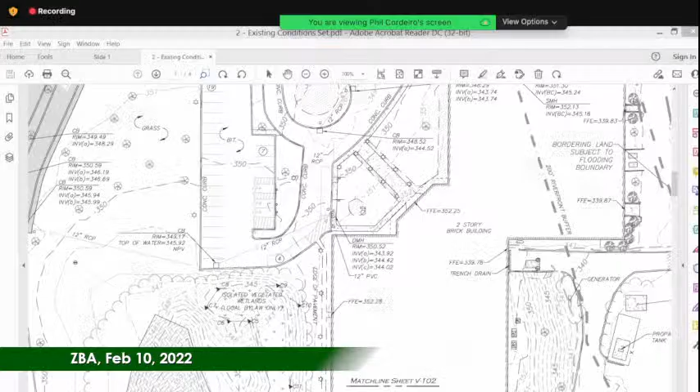Here we go. What is it here? Yeah, there we go. So the C series actually extends onto the next page, and I think the B series is shown on that page as well.

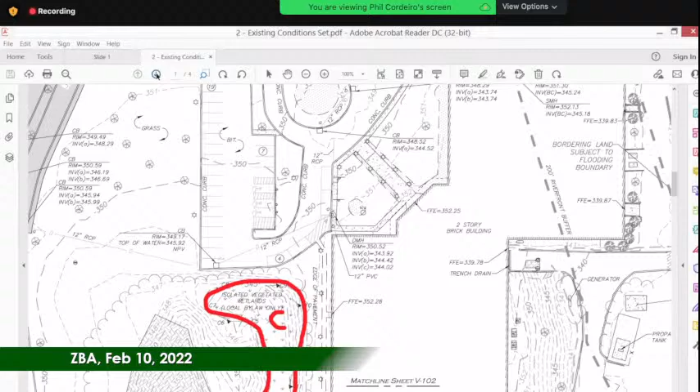So this is the grand scheme picture. There are two existing square-shaped buildings that overlap in a chain-link configuration from an aerial view. The C series is directly to the west - north is straight up, correct? Yes. And the B series is just to the south or southwest of that westernmost building, just south of the building, not along the parking lot. Does that make sense?

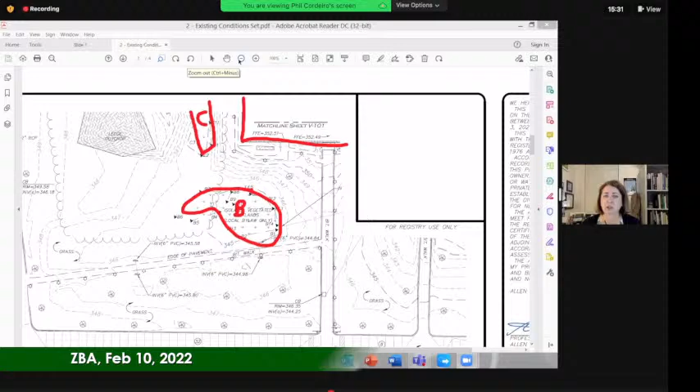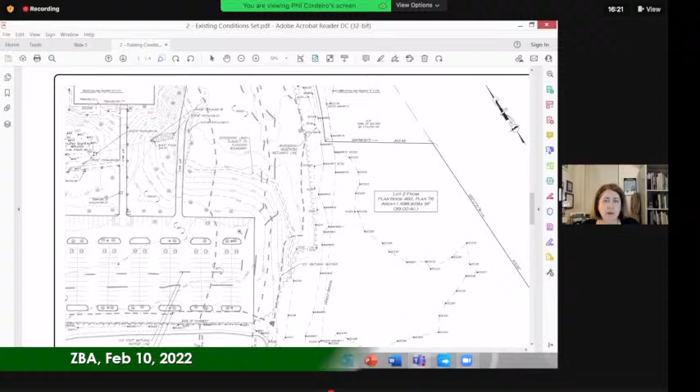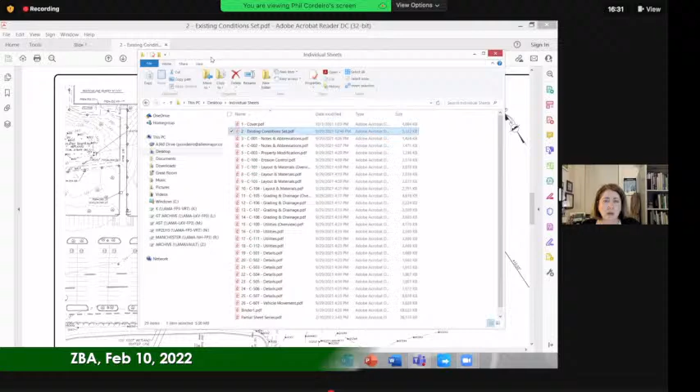So we know the applicant will be filing a notice of intent with the Conservation Commission, and again we recommend clarification of the jurisdictional status of these areas. The applicant also proposes alteration within the 25-foot buffer zone in three different locations: one associated with infiltration system number 1 in the northeast area, one an infiltration system south of the existing parking lot, and the third area of alteration within this 25-foot buffer - a local Conservation Commission jurisdictional area - associated with the proposal for compensatory flood storage.

Sorry to keep switching screens on everybody. No, that's okay - actually this is a good screen to look at, the overview screen. So I will highlight what Amy just referenced, just to circle back on it. Apologies for the delay.

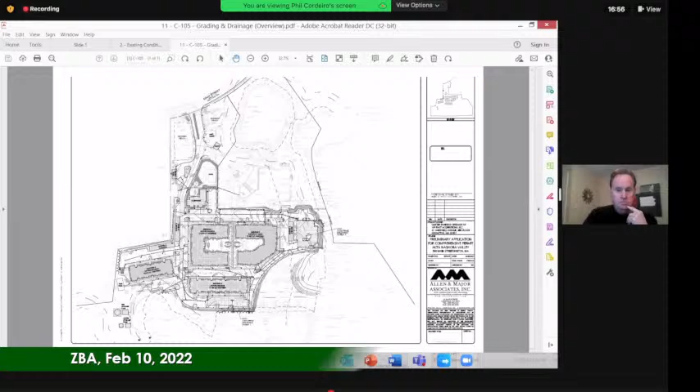Okay, and I'll keep talking, then we can just go back to this a little bit.

The third thing we commented on is the additional permitting considerations specific to the alteration of greater than 5,000 square feet of freshwater wetlands, which will necessarily entail some permitting at the state level for a water quality certification, and potentially may also trigger a MEPA filing. We recommend the applicant acknowledge this during the notice of intent filing, and provide the town with copies of the permit applications for these other agencies as well as the Conservation Commission permits. They may also need Army Corps review because of the extent of the alterations, but the jurisdictional status will determine that.

We bring this up because the applicant has requested a waiver for the local bylaw, with the alteration of two potentially jurisdictional resource areas under the bylaw, without a plan for mitigation at this point, as well as alterations within their 25-foot buffer that come within just a couple of feet, like 2 to 3 feet from the actual wetland boundary where there is potential for additional wetland alteration. We feel the ZBA may wish to retain some of the local bylaw provisions in order to protect the interests local to the resource areas in the town.

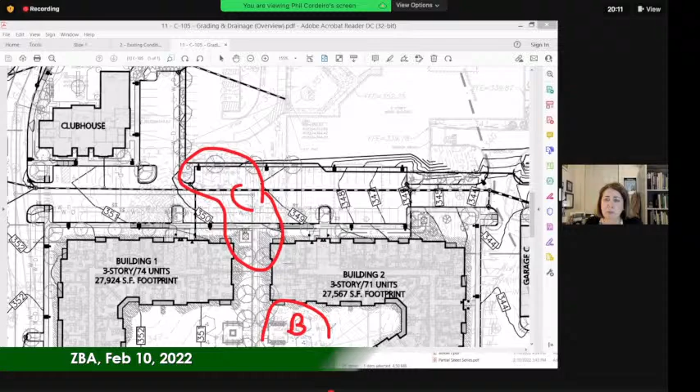Is that sufficient for you, Amy, to continue? It is - I've actually concluded our comments, other than to circle back and state that part of our scope was to do a site visit. We have not yet done one based upon the existing snow cover. That may be feasible in the next few weeks if it continues to stay as warm as it is.

Mr. Chairman, if I might just step in here for a second - Joe Peznola, the zoning board's MHP consultant. There may be a process issue here in that a portion of wetland C appears to be over their proposed lot line. The board doesn't have any jurisdiction to grant relief on allowing the filling of that wetland on the parcel that's going to be retained by the current owner, with regard to the modification of the commercial office building.

And just putting out whether the applicant can speak to that. Mr. Chairman, I didn't know if you wanted to hear from us as the applicant now, or wait until after all your consultants have spoken? I think I can address Amy's comment and Mr. Peznola's comment also, whatever you'd prefer. But why don't we - so we have Amy dealing with the wetlands, and Janet going to deal with other aspects - why don't we address these items if they're easily addressed, and be more relevant in people's mindset at the moment?

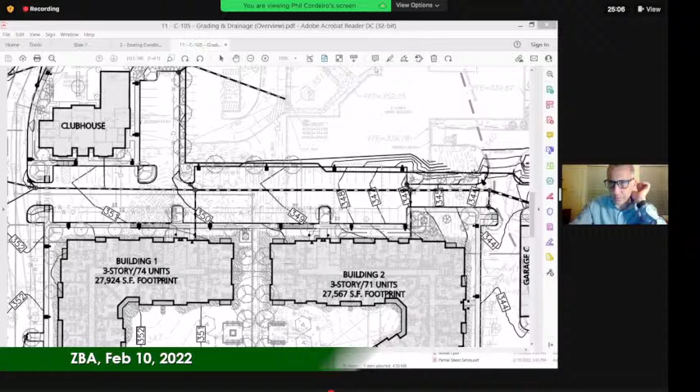Yes, Mr. Chairman, just to expand upon what Mr. Cordeiro said, if a stormwater basin, if you will, was constructed after 1996 with the approval of the local jurisdictional bodies, being the Planning Board and the Conservation Commission, it cannot, under the state wetlands regulations, be deemed a jurisdictional wetland. So I think that's what they're trying to get around, is whether those features were built as stormwater features, and that they were built after the threshold date of 1996, which is a date that's in the current Massachusetts wetland regulations.

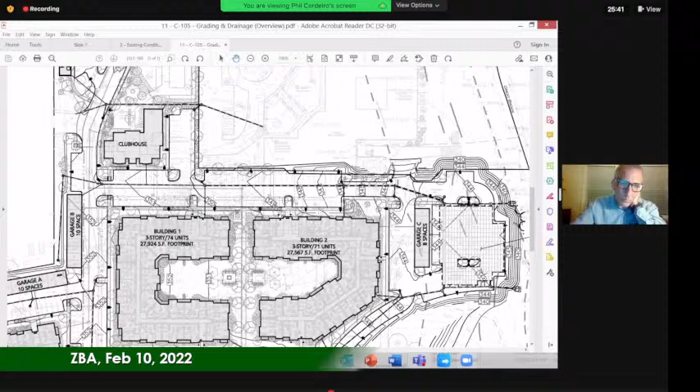I can confirm that, that is true. So being mindful of the dates is something that the applicant will need to demonstrate to the board's satisfaction.

And then other than that, there is just the note about providing mitigation, for raising those concerns for us to keep our eyes open for, and the potential for the proposed alterations providing proximity to the wetlands with the extensive grading.

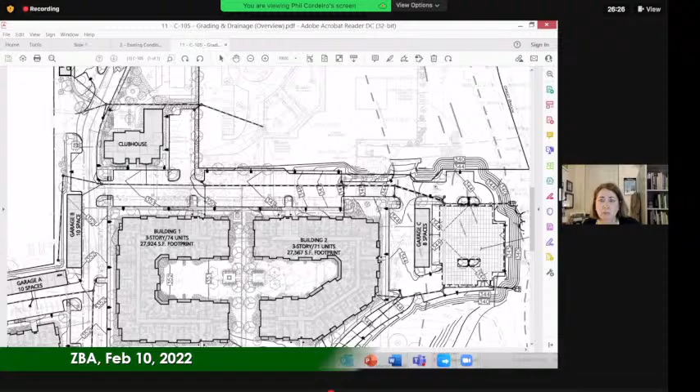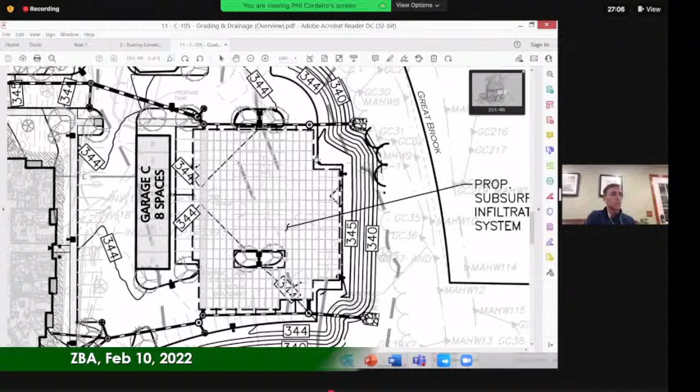So just to jump in while that topic is hot also, Mr. Chairman, members of the board, I did have occasion to speak with Ms. Bernardo yesterday regarding the peer review letter, just so we can all reach an understanding in terms of the necessity of the grading that we're showing and the stormwater locations that we are showing on the plan. Ms. Ball highlighted two areas in her presentation and in her letter, one of which is on the screen here that you can see, which is adjacent to our subsurface infiltration system 2.

The necessity to build up the existing grade to make sure we have separation of groundwater results in the slope that you see on the easterly portion of the site, which results in the proximity grading relative to the delineated wetland resource areas, again, to be affirmed by the Conservation Commission. So we're going to take a hard and close look at that, recognizing the concerns, and see if there's a better solution in the interest of protecting that wetland area in the 25-foot buffer.

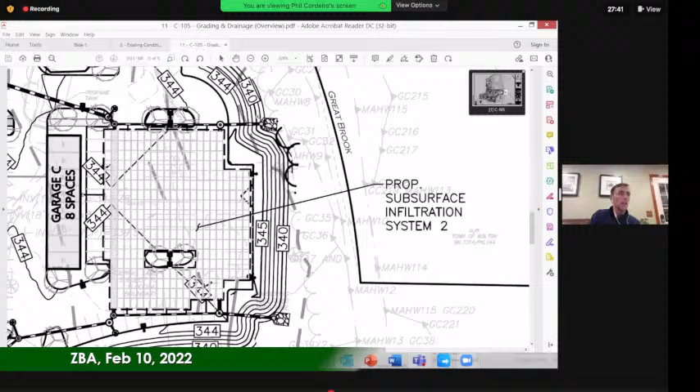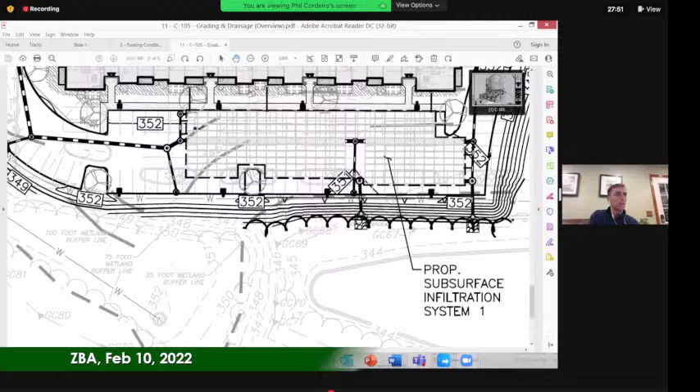The alternate area that was raised is similarly on the southerly portion of our site. And this one gets a little dicier in terms of the exact vernacular of the wetland resource area. For the same reasons that I outlined with the isolated pockets of B and C, the rear fire pond was also created as part of a stormwater management system. So there's ambiguity as to whether there's the same protective radius around it in terms of the no-build buffer line that we are encroaching upon.

So as we work through that condition with the commission, we will work with your consultant in terms of identifying the performance standards that we need to meet relative to the designation that the commission applies here. And that work, again, on the back side of the site, we identified potential delineation through this line, this red line, which would ultimately result in a buffer zone approximately here. Excuse the crudity of my drawing, but the grading, the darkened line that exists between those two red lines, is the encroachment within the potential 25-foot no-touch buffer zone. We'll again take a closer look at that and rely on a lot of the documentation that we have to prepare and work through with the commission.

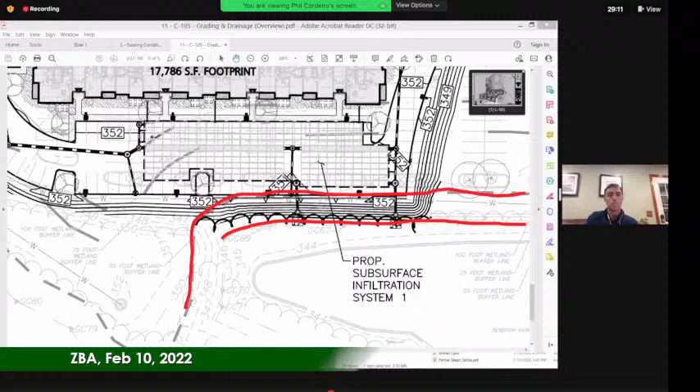Should we continue with our stormwater presentation, or do you have more wetlands questions? Sure.

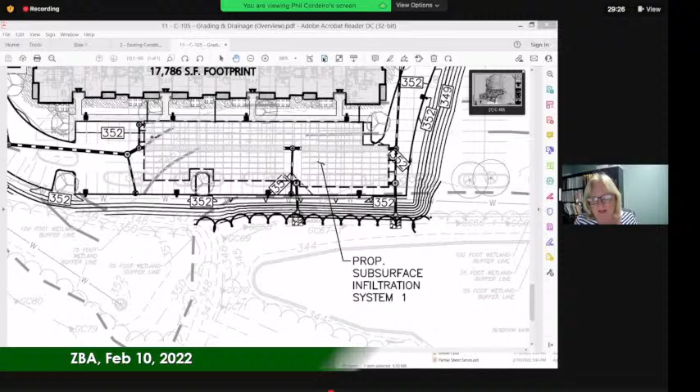Again, for the record, my name is Janet Bernardo, and from Horsley Witten, we looked at the stormwater of this project site. Allen & Major really did a nice job on their stormwater design.

Basically, the system has a number of proposed catch basins, proprietary separators, and pipes conveying stormwater, discharging to two relatively large subsurface infiltration systems, as we just talked about, one on the right-hand side and one on the south side of the property. The one that was just marked in red, that's number two.

That one is located in an area that's currently grass, as discussed by the applicant and Phil, the applicant. We would really prefer to see that one pulled outside of the 25-foot buffer and respect that buffer zone for Great Brook. The subsurface infiltration system 1 is in an existing parking lot.

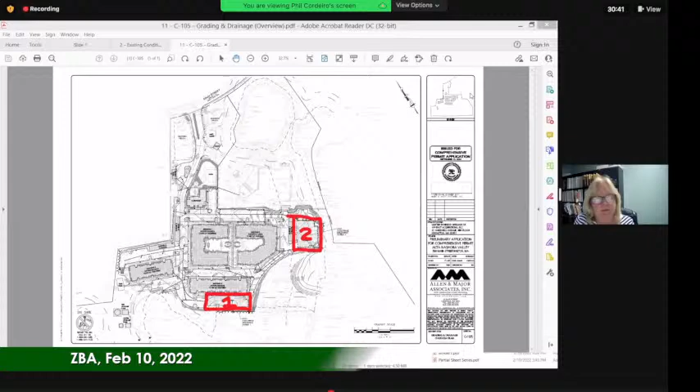The grading that is proposed to the south, between the system and the wetland, or the detention basin, or the fire pond, or whatever it is designated as, is relatively steep, and it's really coming off of the parking lot, right up to the edge of the wetland. We would recommend that they pull that further away to avoid any erosion in the wetlands.

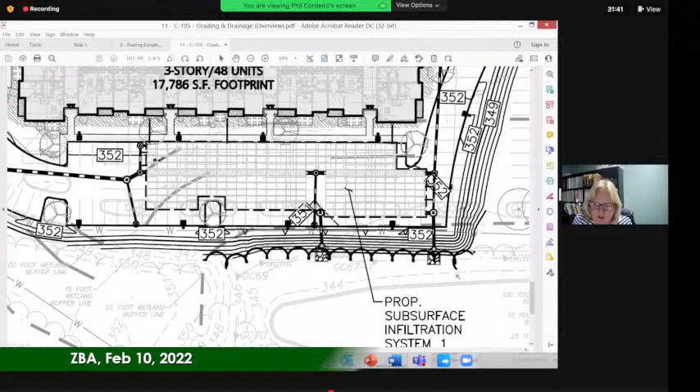The water quality for the design is fairly substantial, so I don't suspect that there's going to be a problem with sediments or pollutants or metals getting into that wetland system, but the discharge point could cause erosion. And if the riprap outfalls are actually inside the buffers or the wetland line, that's considered a fill that the applicant will need to acknowledge and mitigate for. So that's basically our biggest concern, trying to pull those two systems a little further away so that they can respect that 25-foot no-disturb zone.

The applicant also has an area for compensatory flood storage, but we didn't find the calculations for that in the package. Maybe they were there, but it was obvious that they were proposing something in this area, which is an existing parking lot, where they're pulling back the grades to provide compensatory storage.

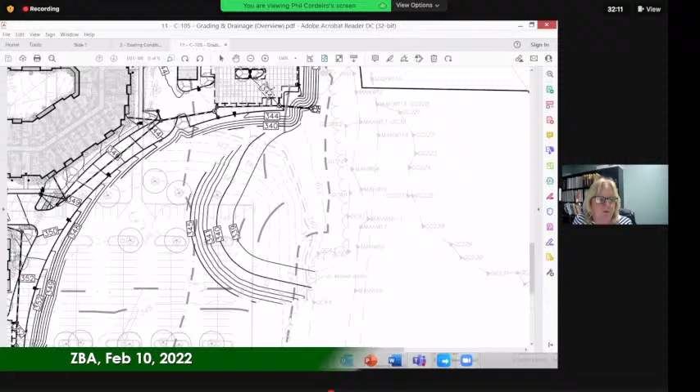This kind of large circle, if you pull out a little bit, you can tell it's a large circle. That is the new well. Is that correct, Phil? This is the new well that is being put in, so that's a radius that they are proposing to protect for that well, having zero impervious area inside that radius, which is why they're removing the pavement. They've added pavement to the north of that, in an area that is now grass, which we struggled with because it just didn't seem reasonable to take away asphalt and then put it in an area that's grass. But the applicant, I think, will address that in some way, whether the well has to be in this exact location, and this makes the most sense.

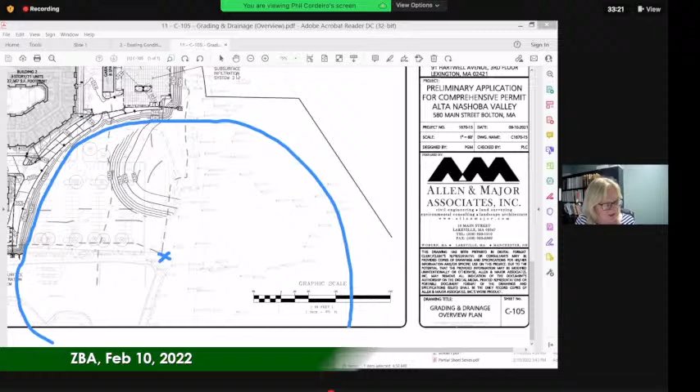So some of our other comments that we are concerned with, there was some minor discrepancies with numbers. We believe the applicant will be able to address those relatively easily, with the amount of recharge required and provided, and the size of the riprap at the outfall. In the HydroCAD model, there was a watershed that really should be divided into two. It's something the applicant should be able to respond to relatively easily.

These systems, we didn't see the test pits. We understand that there's test pits within these two systems, but we couldn't read that information. It was hard to read them on the plans. We think we found them, but understanding exactly where the test logs were and the information that goes along with them, it's like they're there somewhere. So we're looking for that test pit information to review, to understand where the separation to groundwater is, and to make sure that there's adequate separation from the bottom of the system to the groundwater.

If there's less than 4 feet, it needs to have a minimum of 2 feet, and if it's less than 4 feet, they'll need to do a mounding analysis. So we would expect that to come along if there's actually a less than 4-foot separation to groundwater.

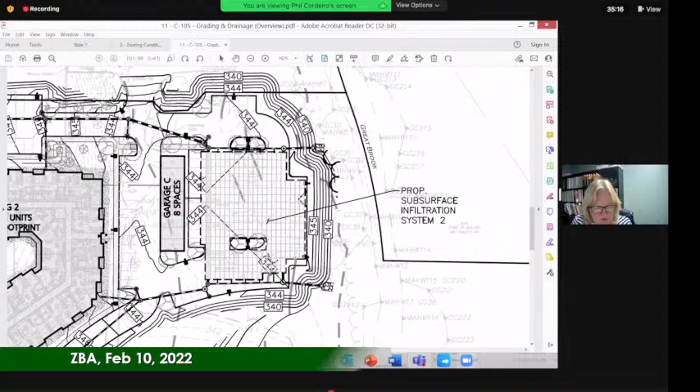There is an existing drain pipe that goes underneath the leach field, which is unusual. So we brought that up as something to pay attention to. The Board of Health may be interested in this drain pipe. Usually you don't have a drain pipe underneath the septic system leaching field, so somebody, the Board of Health, would be interested in understanding that and whether that's acceptable practice.

As far as the two wells and the water supply, the wells will need to be permitted through Mass DEP, as well as the wastewater treatment system, which will have to go through Mass DEP guidelines for the design, construction, operation, and maintenance of a small treatment facility. So those systems...

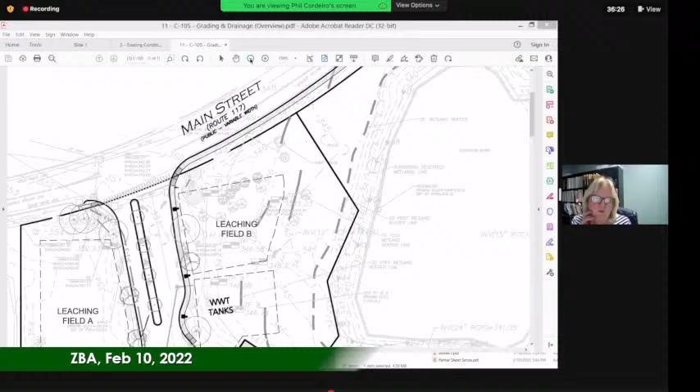The applicant has requested a waiver from the local regulations, but they will need to go through the state regulations anyway, so we do not have any real objection to granting those waivers, though your Board of Health may — that's, of course, we defer to them. But our biggest concern is the separation from the impervious area and limiting the work to within that 25-foot no-disturb zone from the wetlands line.

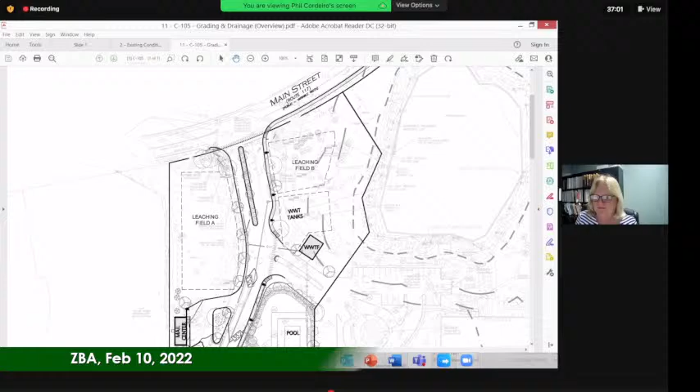Any questions on that? Did you follow all of that? If Phil Cordeiro or the applicant wants to speak to some of your inquiries about documentation and calcs and whatnot, that'd be great. And if anyone from the board has any questions, I want to thank you again for doing a thorough letter review for us. This is helpful for the project dialogue and report.

Mr. Chairman, speaking from Allen and Major for the applicant, we certainly also echo what you just said regarding Horsley Witten's review. It was quite thorough and detailed. We are quite confident that a lot of the administrative detailing that has been asked for, clarifications, detailing, we can accommodate. A lot of bookkeeping issues we will deal with. Riprap sizing, mounding analyses — those will all be responded to since the issues were raised.

We'll absolutely address that. Obviously their biggest concern, what we touched upon under the wetland umbrella, is the proximity to the wetlands. So I expect we'll have a couple more conversations about that, and again, we're confident we can reach a good solution for both of those areas.

I think the only thing I'd want to raise for the board that Ms. Bernardo brought up was really centered around the well, which our new well is here. She pointedly asked the question, does it need to be there? And the answer is yes. In previous hearings with this board, and certainly with the select board...

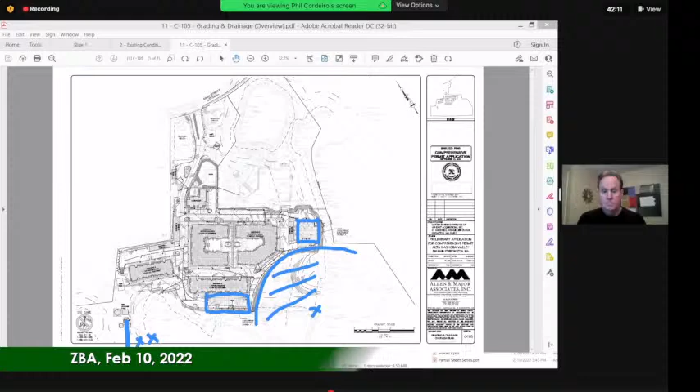Any questions regarding stormwater, or do you want to switch to traffic? Either the board or anyone in the audience, if they have any questions. Otherwise, let's go to the traffic.

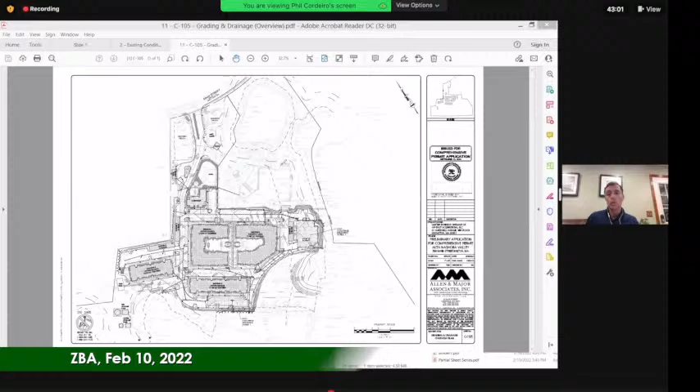One thing, Gerard, this is Andy. There was mention of a drainage pipe underneath the leaching field on the 117 side of the property. Is that something proposed, or is that already there? Through the chair: it is something that is already there. Our schematic design for the leaching field did not pick up on that conflict. Rest assured, we cannot keep the pipe there and meet the DEP standards, so when you see the plans next, that pipe will be relocated outside of the leach field, avoiding that conflict. That was an oversight on our part. Thank you, perfect, thank you.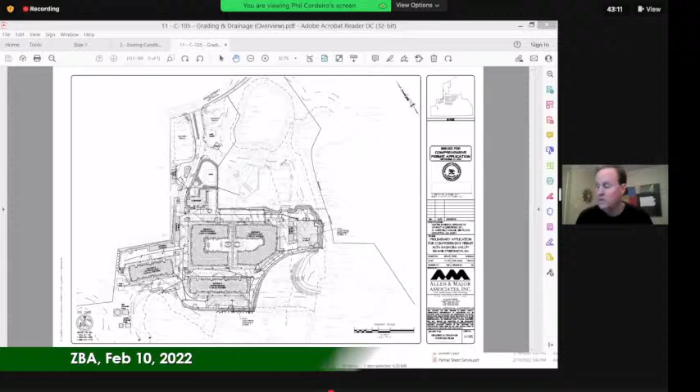Okay, so why don't we switch to traffic at the moment?

Thank you, Mr. Chairman, members of the board. For the record, my name is Jeffrey Dirk. I'm the managing partner with Vanasse and Associates, and as you heard in the introduction, we were retained by Horsley and Witten as the transportation consultant for the board. So just a high level overview of what we undertook as part of our review—I think the chair noted you received our comment letter yesterday, so it's fairly new to the packet you have. I'll provide a summary of our comments similar to the other presenters.

Our role is reviewing the transportation aspects of the project, and it's not just the traffic study prepared for the development. It's also looking at the site plans, similar to what Janet was doing, only our focus is more on circulation within the site, the parking layout, and looking at pedestrian and bicycle accommodations. So it's all aspects as they relate to transportation.

Starting with the traffic study or transportation assessment prepared for the project: it was conducted in September of last year, so we took a thorough review of that. The first thing we do is ensure the study was prepared in accordance with industry standards as well as those of the Massachusetts Department of Transportation. MassDOT sets guidelines and standards that we as traffic engineers in the Commonwealth follow when conducting this type of study, to ensure that as this board or other town boards review projects within the town, those studies are consistent in how they're presented.